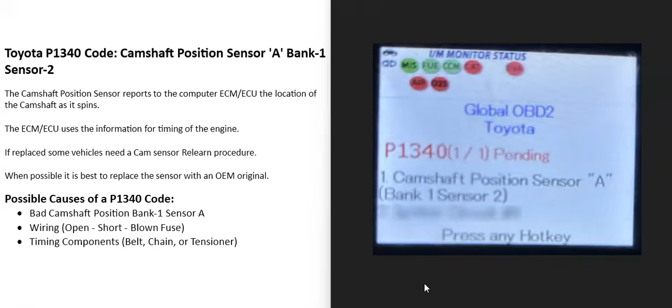So what does this mean? Well, basically there's what's called a Camshaft Position Sensor that's just tracking the camshaft as it spins. As the camshaft is spinning, there's notches located on it that the sensor can detect. Every single time one of these notches is directly in front of it, it's going to send a signal back to the computer. The computer can track this, do its calculations, and it's going to know the timing of the engine this way.

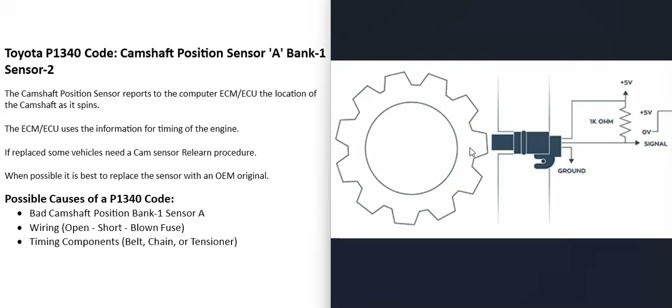But when you get this P1340 code, the computer's seeing a problem with this sensor, and so it's going to have to be troubleshooted to know why.

If you have a 4-cylinder engine, there's only going to be one bank on the engine. But if you have a V6 or V8 engine, then the engine's going to have 2 banks. Bank 1 is always going to be the side of the engine with the number 1 cylinder, and the opposite of that is going to be bank 2. So if you locate the number 1 cylinder on that engine, since there can be differences, then that side of the engine is going to be bank 1.

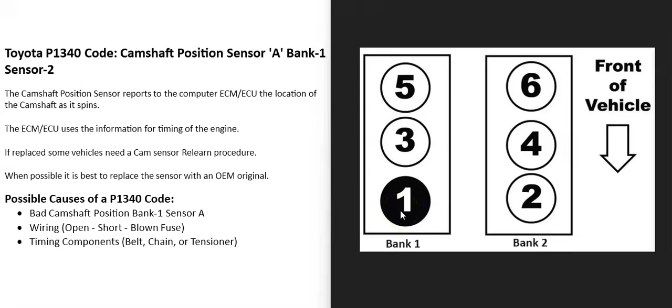One thing to note about these camshaft position sensors is that depending on the vehicle, the year, the make, the model, sometimes they need what's called a cam relearn procedure, where the computer relearns the small variances that comes with a new sensor. This is really going to vary.

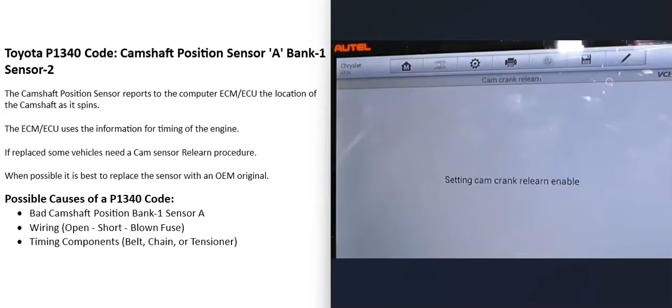Toyota usually is pretty good where you can just swap them out and the computer automatically relearns. Also, for this reason, when you go to buy a sensor, if you can, try to get an OEM original sensor, for example, like Denso or something like that, because hopefully there won't be as big a variance inside of an OEM sensor as there is inside of a third-party aftermarket sensor. But just keep in mind that sometimes when you swap out these sensors, some vehicles' computers need what's called a relearn, while others don't. So what would be some possible causes of a P1340 code?

Well, the first thing that could cause this is that camshaft position sensor has gone bad and needs to be replaced, or the wiring going to it. There's some different ways to go about testing these sensors. I've made videos on that. I'll put a link in the description box below if you want to check that out.

Also, there could be multiple camshaft position sensors. There could be 1 on each bank of the engine, or there could be 2 on each bank of the engine. If your engine has a single cam, then there's only going to be 1. But if you have a dual overhead cam, then there's going to be 2 on each bank of the engine. And if you do have 2 sensors, sensor A is going to be on the intake, and sensor B is going to be on the exhaust side of the engine. So be sure to keep that in mind.

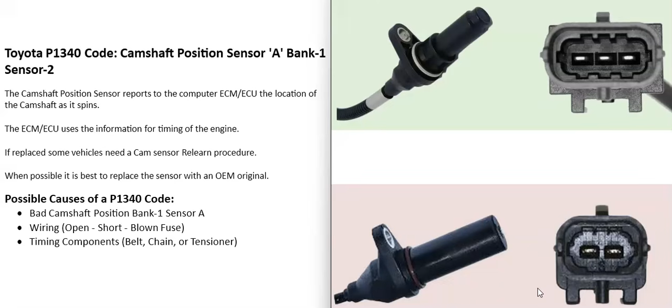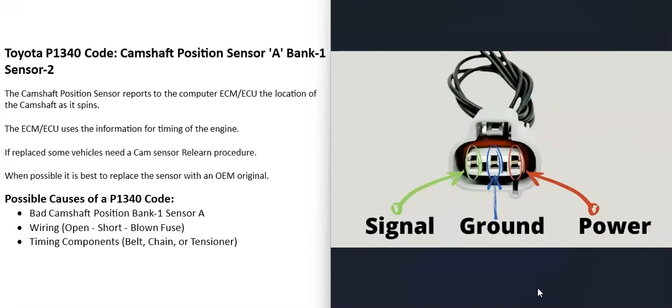Also, there could be 2-wire sensors or 3-wire sensors. A lot of older vehicles are going to have the 2-wire sensors, while most of the newer vehicles are going to have the 3-wire sensors. The 3-wire sensors are very common. Basically, what's going on with these is that you're going to have a ground wire, you're going to have power going to it, usually 5 volts, and every single time a piece of metal is directly in front of that sensor, it's going to send a signal back to the computer.

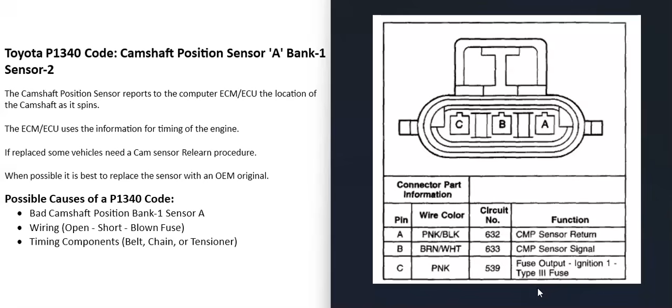If you do go to check the wiring on a camshaft position sensor, it's always a good idea to get a wiring diagram for that specific vehicle. That way you know for sure what's going on. But the first thing that could cause this is the bad camshaft position sensor or the wiring going to it.

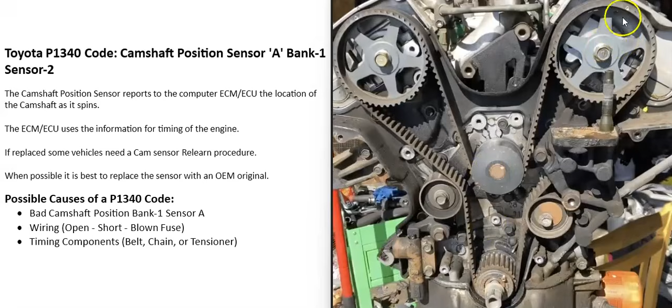The next thing that could cause this is that there's some kind of timing component that's having some kind of problem. This would be like a bad belt, a bad chain, a bad tensioner, something like that. And basically, the engine has timing marks and everything needs to line up. And if one of these timing marks gets off, then that's going to cause problems.

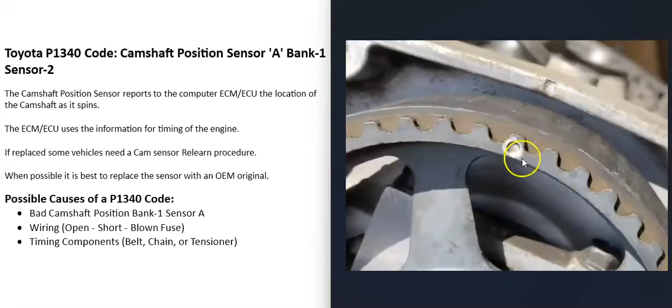For example, say a timing belt slips, and this mark right here doesn't line up anymore. It's a little bit before or a little bit after. So that camshaft's not spinning where it should be. Then that's going to throw everything off and it's just going to cause issues.

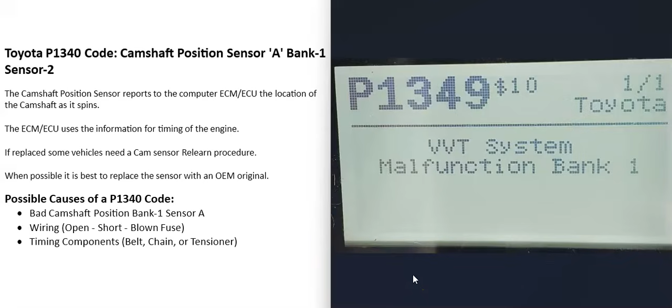Usually when that happens, you also get variable valve timing codes or different things like this. For example, like a P1349 VVT system malfunction bank 1 or something like that. So if you are getting any other codes, be sure to pay attention to that because that can help point you to what the problem is.

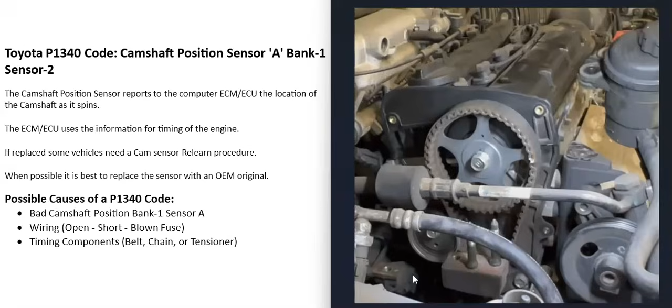But the last thing on the list is going to be that there's some kind of issue going on with one of the timing components that's throwing everything off and it's causing the camshaft position sensor to get a bad reading and setting this P1340 code. And so that's basically it. I just wanted to give a basic overview of how you go about fixing a Toyota with the P1340 code.